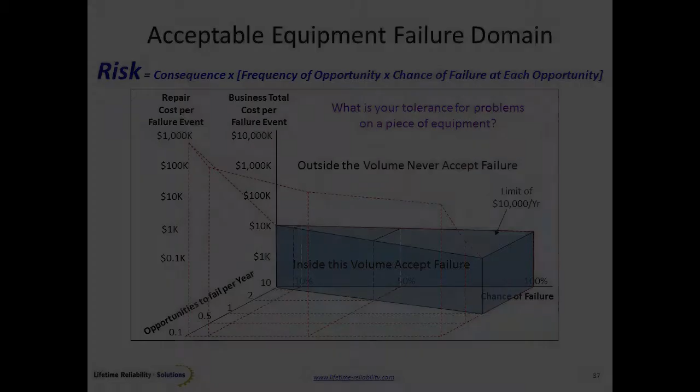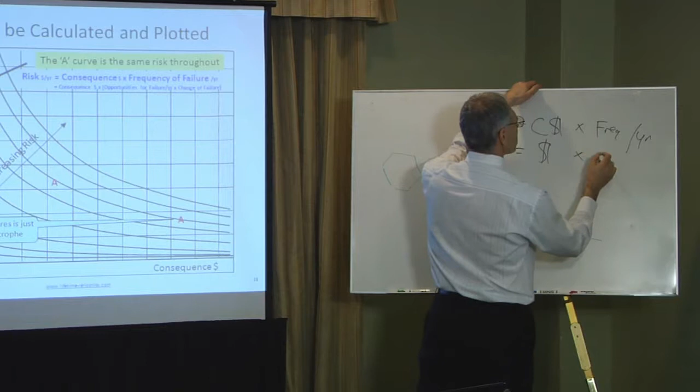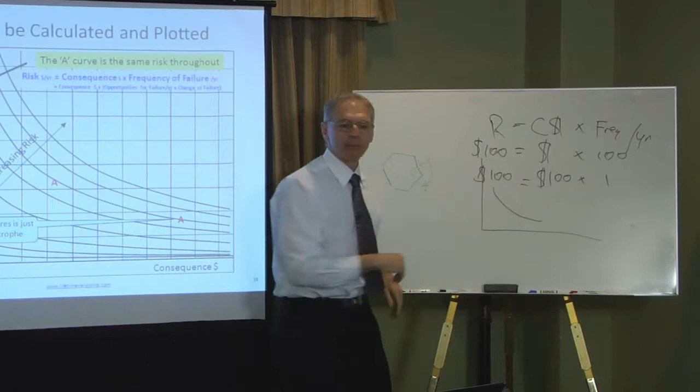Risk, if I keep it simple, is equal to consequence, which is dollars, times frequency, which is frequency per year. If I plot that, so if it's $1 and it happens 100 times a year, my risk is still $100. Or it's $100 times once a year, still $100. That's how we get these curves from that one equation. We just change those numbers and get a curve plotting across our chart.

What's important here is to realise that risk, that curve, is the same risk to the company. So down here, high consequence, that big explosion that blows up the place, once only, huge consequence, don't want to do that. That's obviously going to destroy the business.

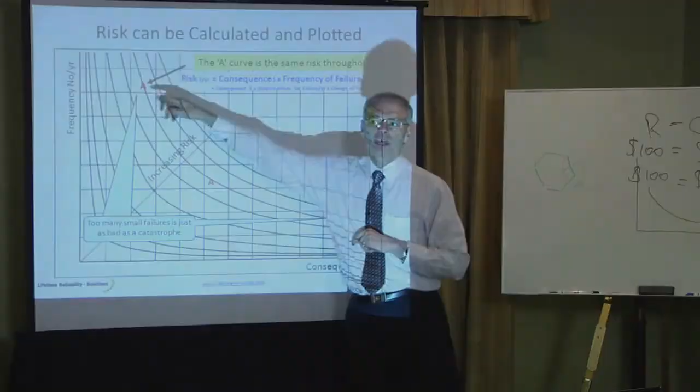The trouble is that risk is the same. So if I have a problem that comes back again and again and again over the years, that cost is the same. Repeating problems that cost a little bit of money but are always there, I'm always fixing those, in the end are as bad as the whole place blowing up. The money goes. Instead of being a bucket of money, it's a little drip. Drip here, little drip there, little drip there.

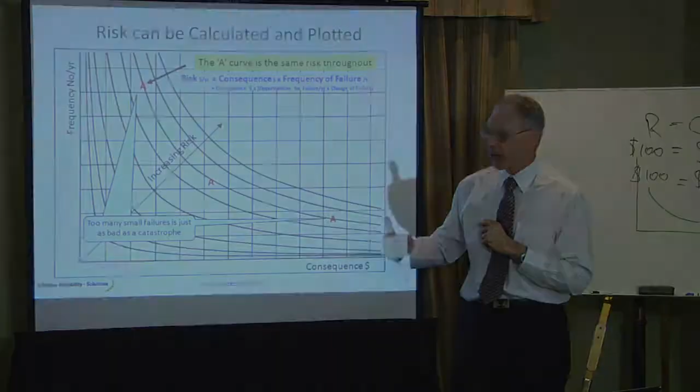The trouble is the business pays for the lot. So I cannot carry small risks that repeat, because that is a leak, and that leak eventually will drain the business out. If I've got many leaks, I am forever putting stuff in the top to replace what's been leaking out.

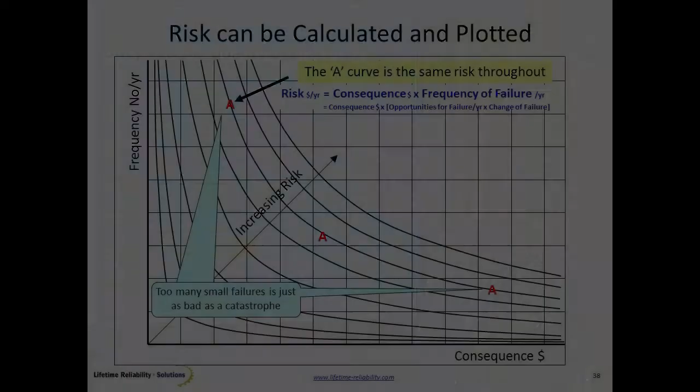That was the trouble these guys were suffering. Half of what they're doing repeats every 3 months, a third every month. They had massive little leaks, thousands of these little leaks, sucking money, sucking the blood out of their business.

Because the big stuff everybody sees, that's a big problem, we protect against that. They forget about the small ones. And the small ones are as bad as the big problems in the end. So I've got to be careful. That's what risk is about.

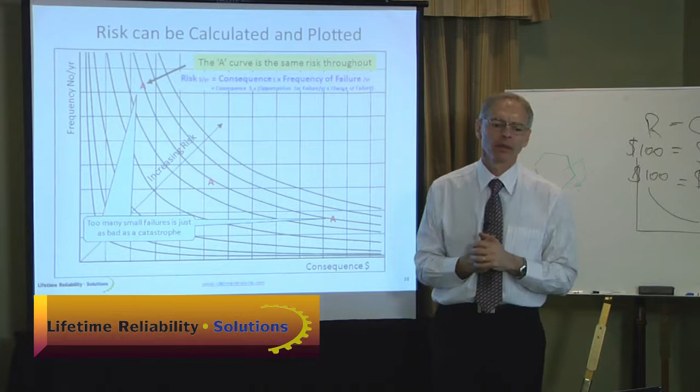Risk is that curve. Anywhere along that curve is the same money I'm losing. It happens to be one event here across 10,000 events, but I've got 100,000 events happening every day. So I can lose money very, very fast, but a small amount each time.